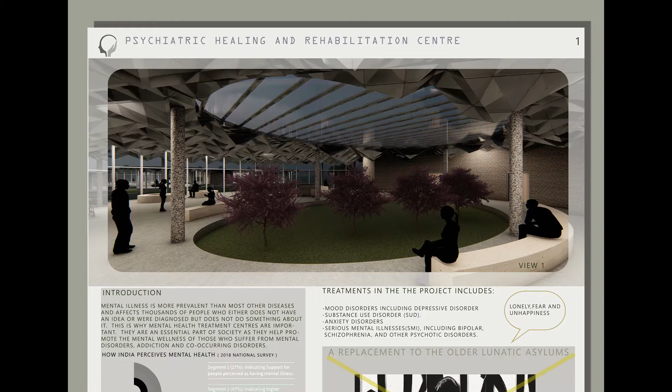Hi all, this architectural thesis project is done by Mariyam Zeba from MES College of Architecture. The project is Psychiatric Healing and Rehabilitation Center.

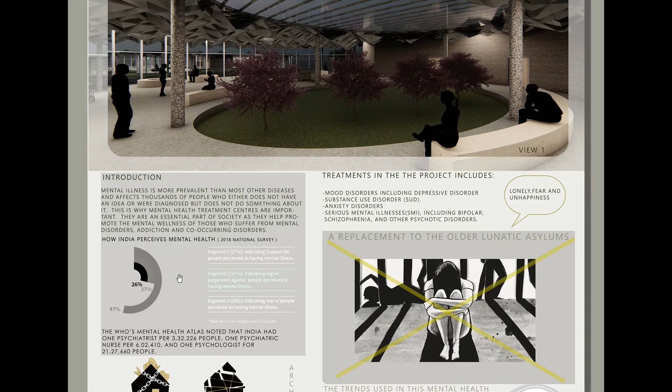Let's start with the introduction to the project. Mental illness is more prevalent than most other diseases and affects thousands of people who either don't have an idea or were diagnosed but don't do something about it. This is why mental health treatment centers are important. They are an essential part of society as they help promote the mental wellness of those who suffer from mental disorders, addiction, and co-occurring disorders. Now let's see how India perceives mental health. In conclusion, mental health centers are needed in the country as well as in the state.

These are all the architectural illustrations of the mental disorders, starting from anxiety, schizophrenia, dementia, bipolar, depression, and eating disorders.

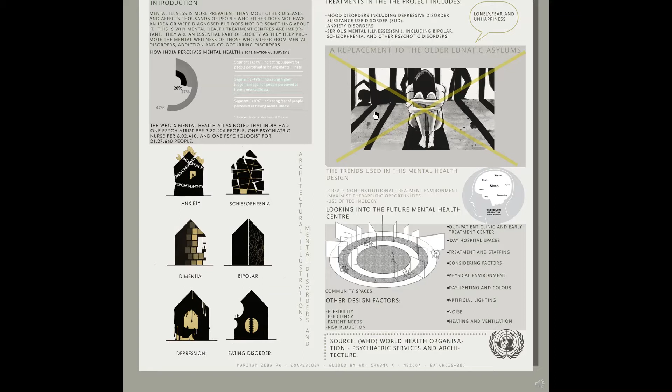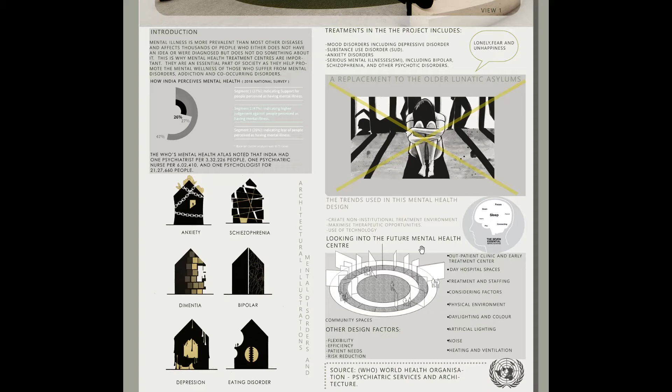Now let's start with the concept of the project. It is a replacement to the older lunatic asylums. The trends used in mental health designs are creating a non-institutional treatment environment, maximizing therapeutic opportunities, and use of technologies. The sources are from the World Health Organization, Psychiatric Services and Architecture.

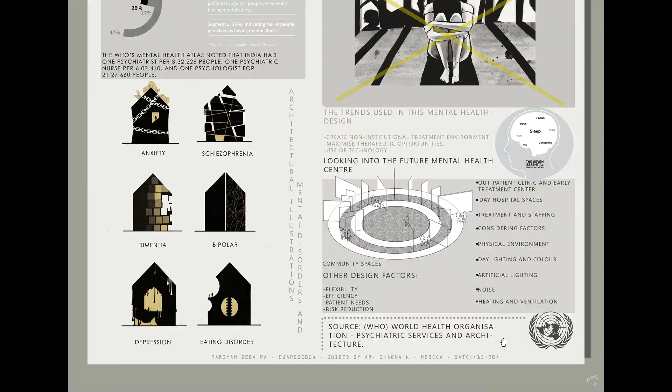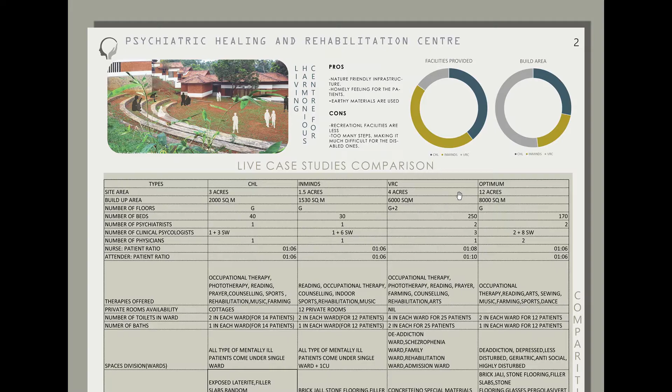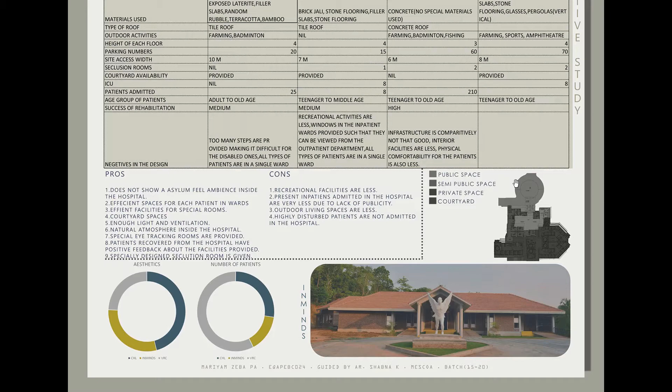The live case study projects that I have done focus attention on the various aspects of the hospital environment such as light, color, and creation of spaces, which is very different from the old lunatic asylum concept. In some of the case studies, there are many recreational spaces and the patients' comfortable living conditions was very high. The public spaces, private spaces, and semi-public spaces were very well confined in the case studies, which are very essential factors in designing a mental health center.

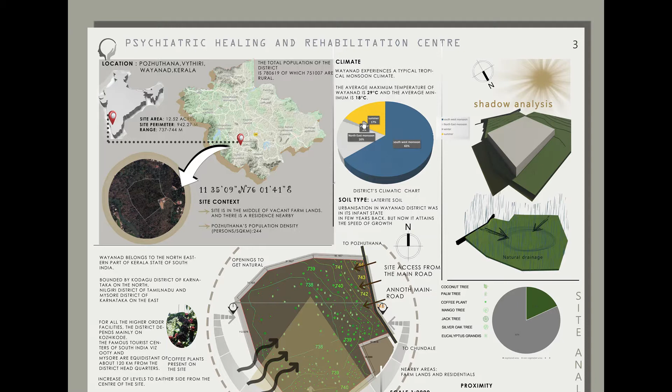The project site is in Wayanad, Kerala, which is of 12.4 acres of land. Talking about the site context, the site is in the middle of vacant farmlands and there is a residence nearby. Talking about the climate, Wayanad experiences a typical tropical monsoon climate. Talking about the slope analysis of the site, the slope is less than 10%.

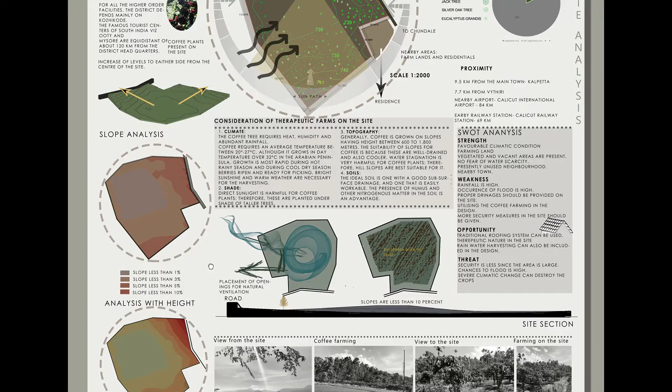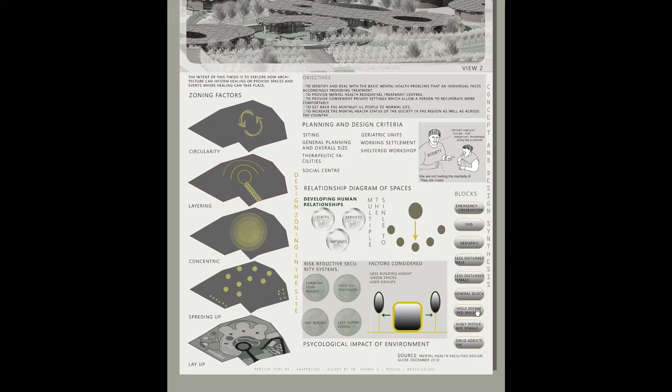Patients are given different spaces according to their mental health statuses, whether seriously ill or less disturbed. That is, they are grouped into different wards according to their mental health statuses.

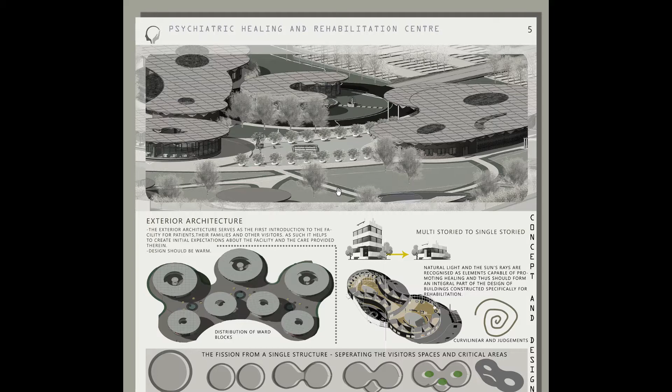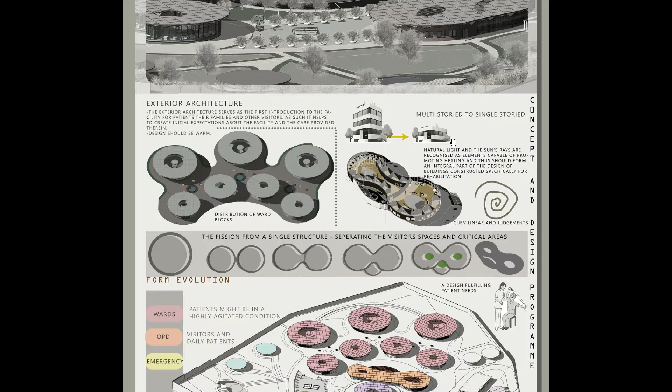The exterior architecture serves as the first introduction to the facility for patients, their families, and other visitors. As such, it helps create initial expectations about the facility and the care provided therein. This is the ward blocks separating the seriously ill and the less disturbed patients. The single-storied buildings are provided by considering the risk measures and the fear of the patients.

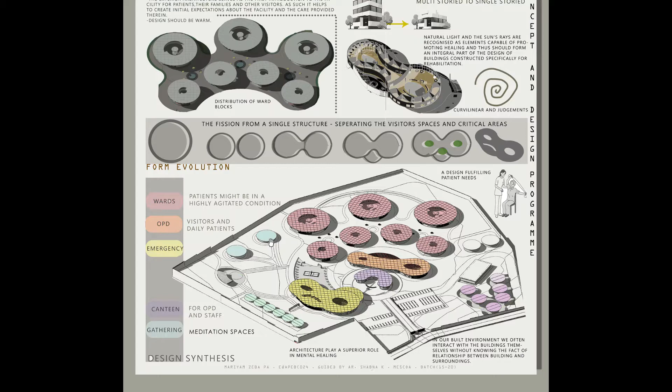This shows the design program of the emergency block, from a single structure to separating the visitor spaces and critical areas and providing green spaces. This shows the placement of the building blocks in the site. The yellow color shows the emergency block, the orange color shows the OPD, the pink color shows the wards, and the blue color shows the gathering spaces.

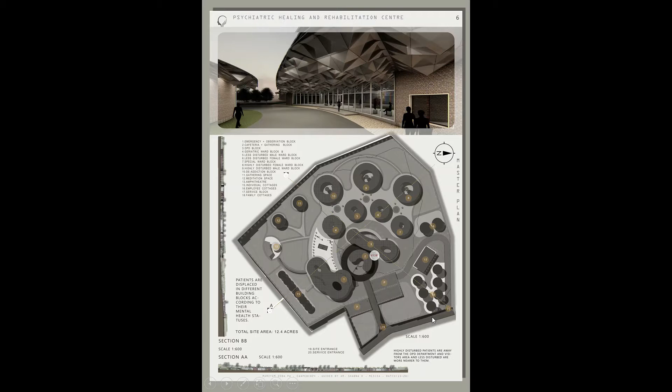Now let's start with the master plan. This is the whole site, and north is towards this direction. There are two entrances to the site, 19 and 20, where 19 is the main entrance and 20 is the service entrance. As the user enters, there are two parking lots on either side. It goes to a roundabout where there are two drop-offs.

The first block is the emergency and observation block, and the third block is the OPD department. So when an acute patient comes, he will be directed towards the emergency block. And when a chronic patient comes, he will be directed towards the OPD department, and daily visitors can also drop off at the OPD department.

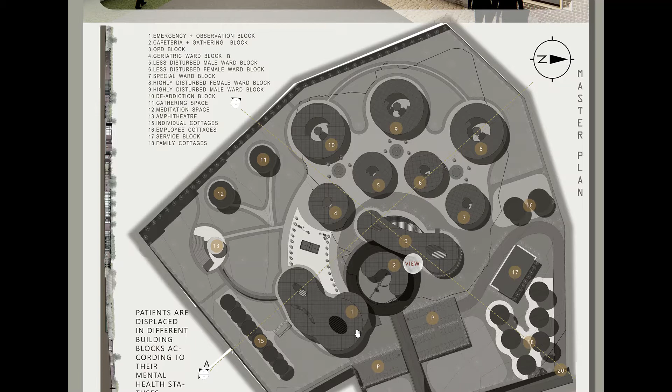Now I will explain the blocks. The first one is the emergency plus observation block. The second one is the cafeteria and gathering block. Third one is the OPD block. Fourth one is the geriatric ward block. Fifth one is for the less disturbed male ward block. Sixth one is the less disturbed female ward block. Seventh one is the special ward block.

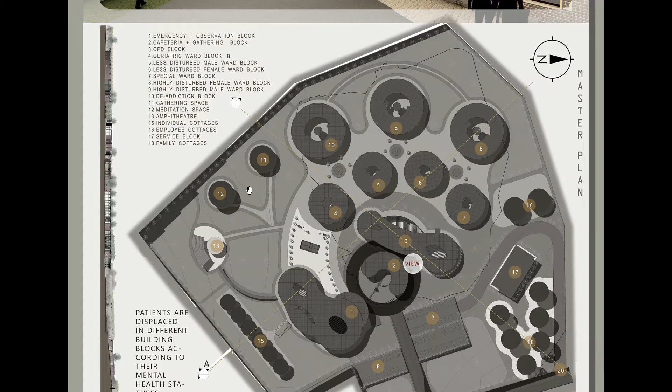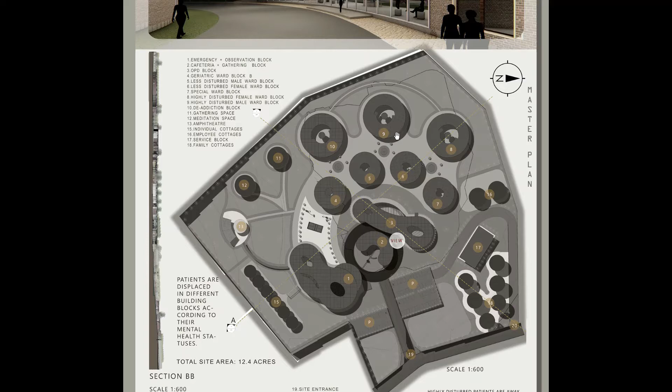Patients are placed in different building blocks according to their mental health statuses. That is, the less disturbed are closer toward the OPD department, and the more disturbed or seriously ill patients are away from the OPD department or the visitors' area, in view from in front of the OPD department.

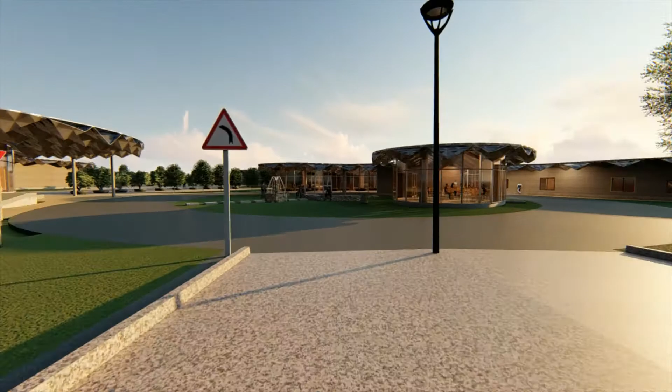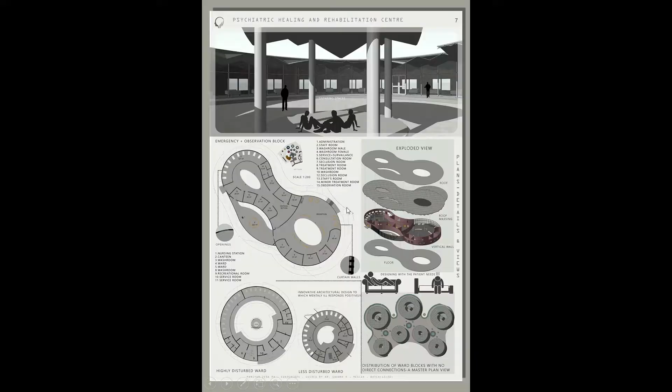Now, let's move towards the planning section. I will start with the emergency and observation block.

When an acute patient enters, he will be directed either towards the critical section or to the consultation room if he or she is in a condition to talk to the staff or the doctors. These two are the green courtyards, and now let's move towards the rooms.

The first one is administration, the second one is the staff room, third the washroom for male, and fourth the washroom for female. Fifth one is the surveillance and service room.

Now let's move towards the critical section. Seventh one is the seclusion room. Eighth and ninth are the treatment rooms.

The patients will not be directly admitted towards the other ward blocks. Firstly, they will be observed in this section for 3 to 4 days.

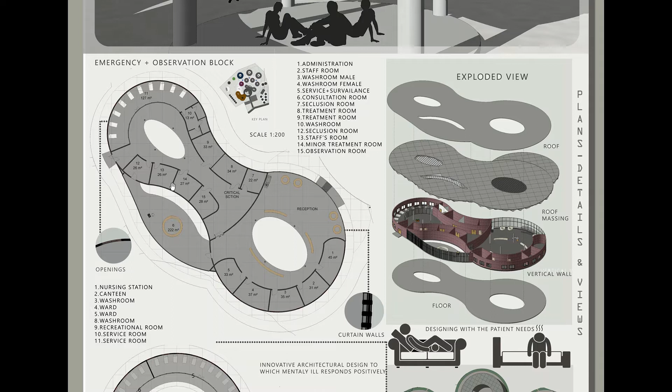If an acute patient comes in the consultation room, sometimes he may behave abnormally from there. This consultation room is designed in such a manner that the patients will not feel that they are in an enclosed room. There is green space here and green nature outside.

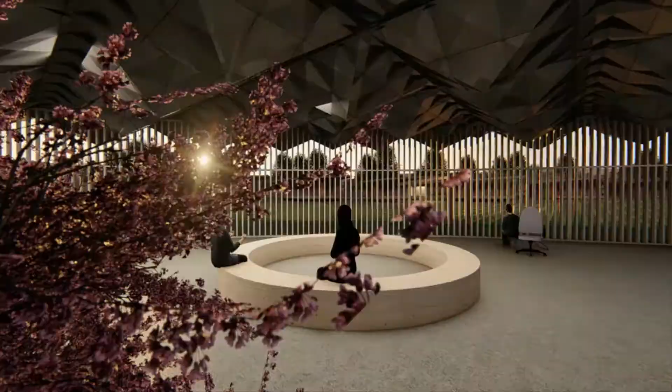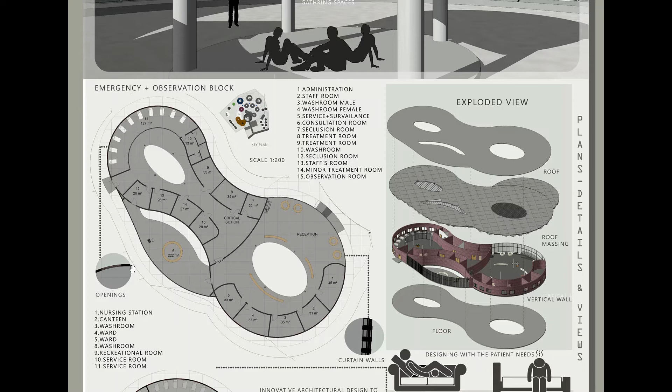Thirteenth and 14th are staff's rooms and the minor treatment rooms, and 15th one is the observation room. The openings are given as such as the window openings and the curtain walls in front of it.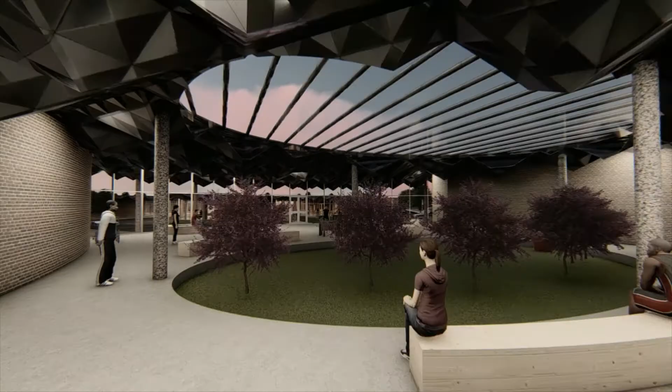Now let's see the planning of the ward blocks. This is the entry, this is the nursing station, this is the service room, this is the canteen and kitchen.

5th and 6th is the bed area, and 4th and 7th is their washroom. These two are their washrooms. 8th is the service room, and 9th one is the recreational room.

And in the middle there is a small gathering space. The less disturbed ward is also similar to the highly disturbed ward, but it has less area. This is the cutout from the master plan showing the distribution of ward blocks where there is no direct connection.

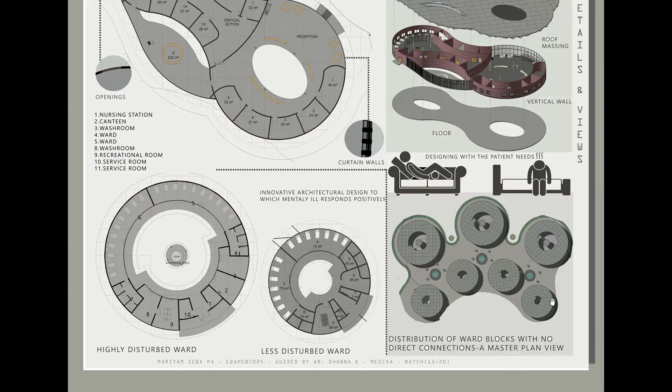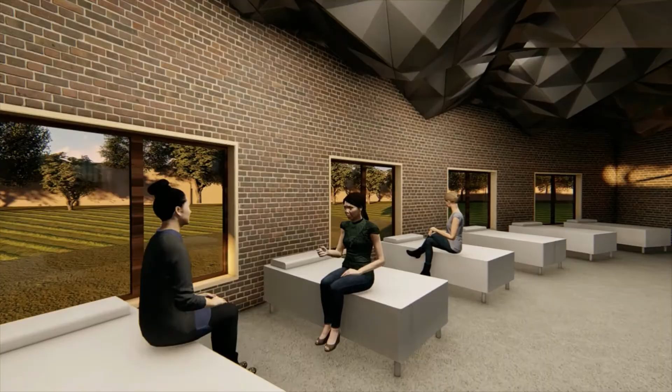As I go deeper into the planning, it moves more towards the healing spaces. Now I will explain the planning of the outpatient department. Here is the entrance, then comes the reception.

In the outpatient department, patients come along with their families, and for the patients it will be a session of 3 to 4 hours. So their family has to wait there for long hours.

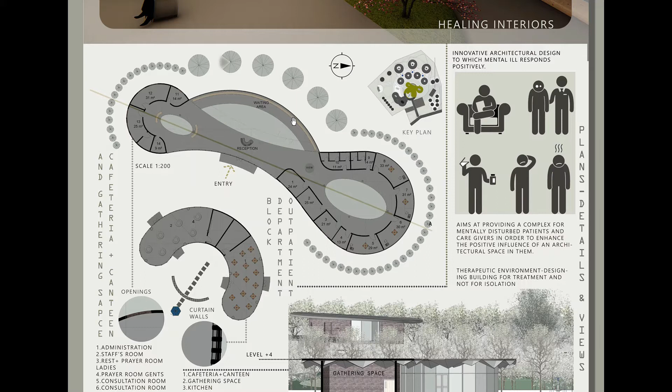So a beautiful waiting area is given to them with a view to the green spaces, to the outside as well as the inside.

Now I will explain the planning of the cafeteria and canteen block. This is the cafeteria and canteen, this is the kitchen and service, and this is the gathering space where the daily visiting patients can have a social interaction.

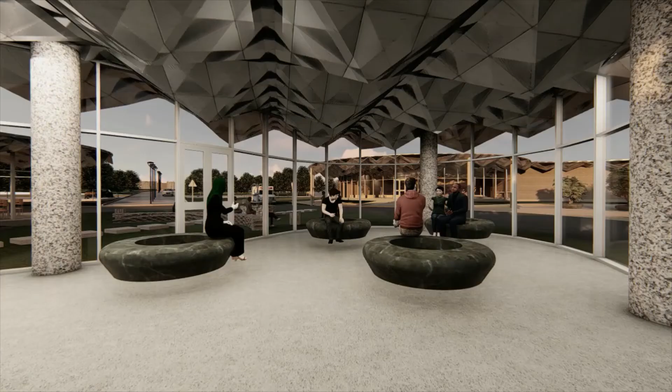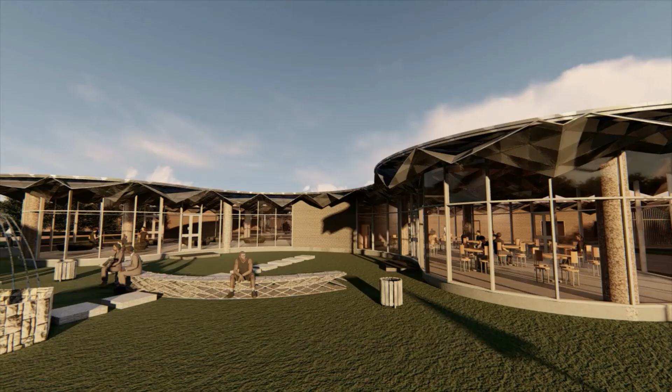And in front of them there is a small recreational space. This is the section cutting through the canteen block. This is the gathering space, and in front of them there is a small recreational space.

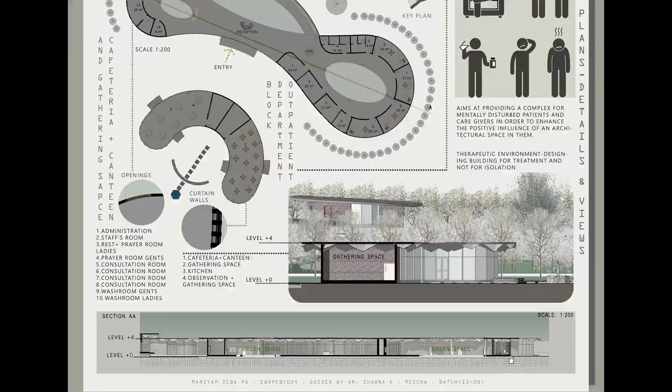This is the section cutting through the outpatient department, cutting here. There are 2 green spaces, and here comes the waiting area. This is a view to the waiting area, showing the healing factors.

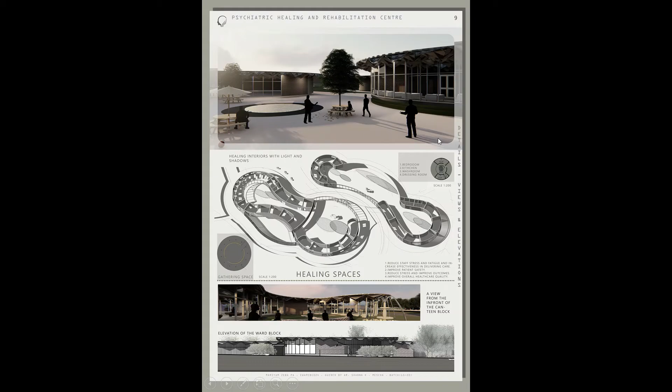This is the view showing the recreational space between the ward blocks. These are the views which show the healing interiors with light and shadows. This is the plan of the gathering space.

A view showing in front of the canteen block. This is the elevation to the ward block. Talking about the landscape, trees and plants are placed in between the blocks so that they have beautiful views, which

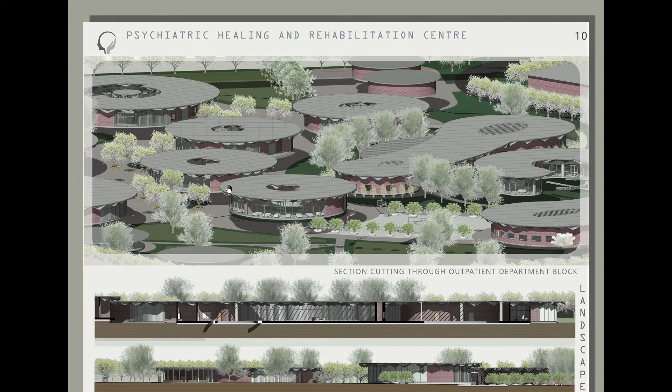also leads to the patient's fast recovery. This is a section cutting through the outpatient department block where there are 2 green spaces, and this shows the waiting area. This is an elevation to the emergency block.

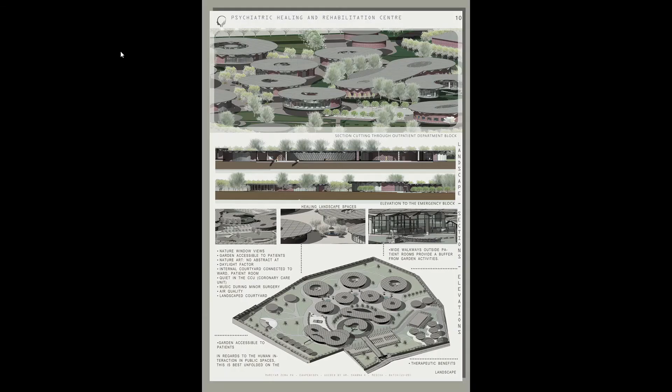These views show the healing landscape spaces. This is a bird's eye view to the site.

Talking about the design development concept analysis, the patients living in the center should not feel that they are living in a psychiatric center. So the design is done to achieve that feeling.

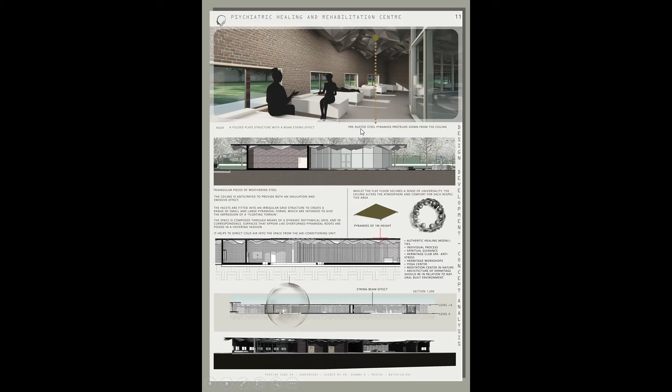The roof looks like a folded plate structure with a beam string effect. It is the pre-rusted steel pyramids that protrude down from the ceiling. It is the triangular pieces of weathering steel.

The ceiling is anticipated to provide both an insulation effect and an emissive effect. The facets are fitted into the irregular grid structure to create a range of small and large pyramidal forms which are intended to give the impression of floating terrain.

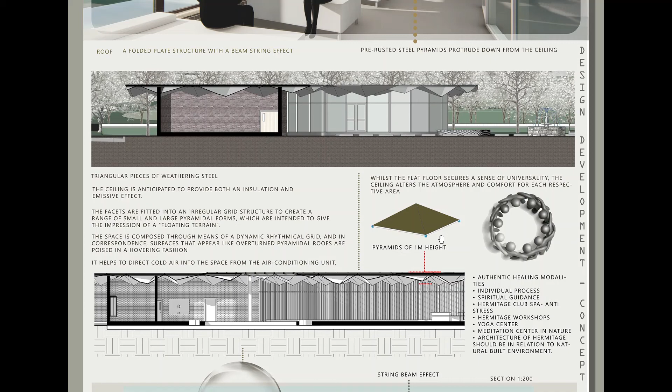The space is composed through means of dynamic rhythmic grid, and its corresponding surfaces appear like overturned pyramidal roofs poised in a hovering fashion. While the flat floor secures a sense of universality, the ceiling alters the atmosphere and comfort for each respective area.

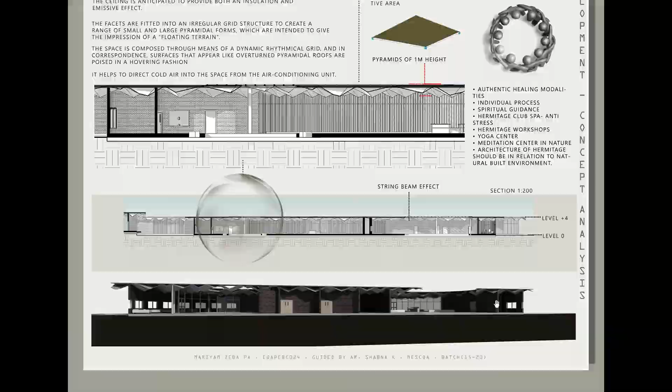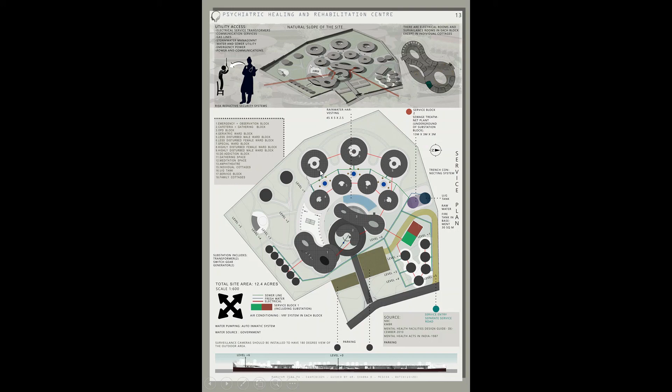Here is a sectional view. This is the service plan which shows the service block and substations and the connections. Other main service in this mental health center is the risk reductive security systems.

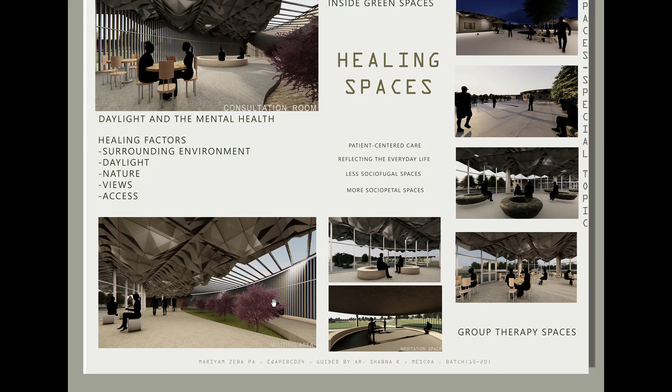This is all about the project, and thank you.